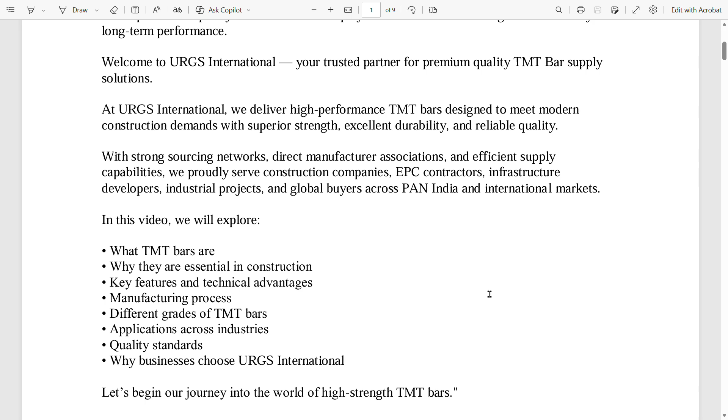In this video, we will explore what TMT bars are, why they are essential in construction, key features and technical advantages,

manufacturing process, different grades of TMT bars, applications across industries, quality standards, and why businesses choose URGS International.

Let us begin our journey into the world of high strength TMT bars.

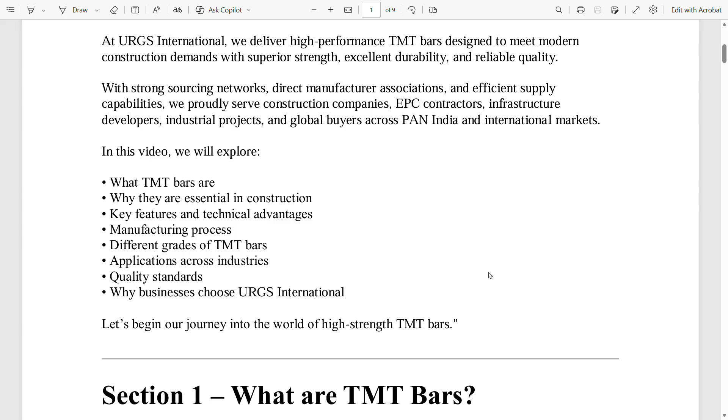Section 1: What are TMT bars? TMT stands for thermo-mechanically treated bars. These are high strength reinforcement steel bars widely used in construction and infrastructure projects.

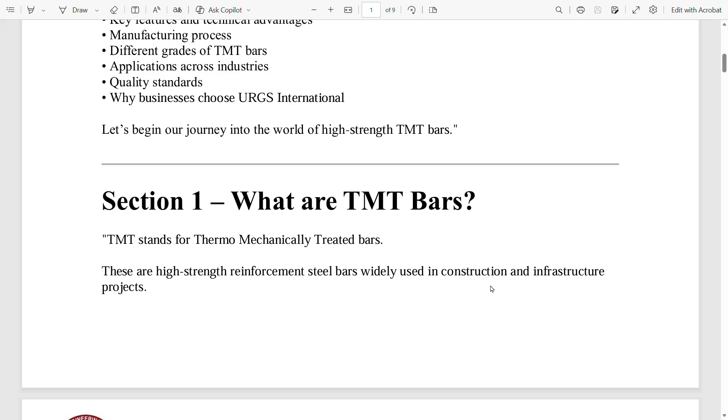TMT bars are specially manufactured through advanced thermomechanical treatment processes that improve their strength, flexibility, corrosion resistance, and durability.

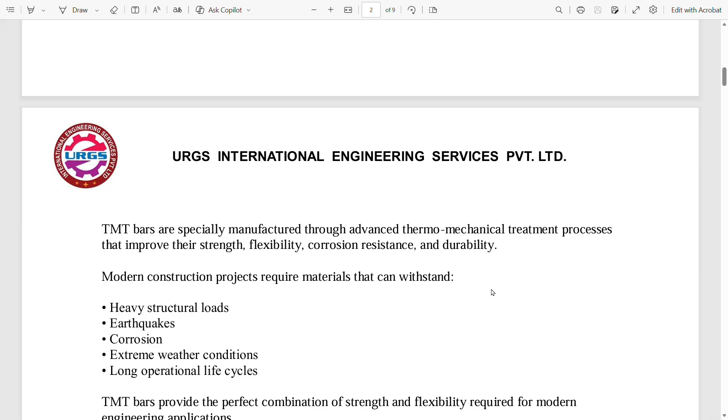Modern construction projects require materials that can withstand heavy structural loads, earthquakes, corrosion, extreme weather conditions, and long operational life cycles. TMT bars provide the perfect combination of strength and flexibility required for modern engineering applications.

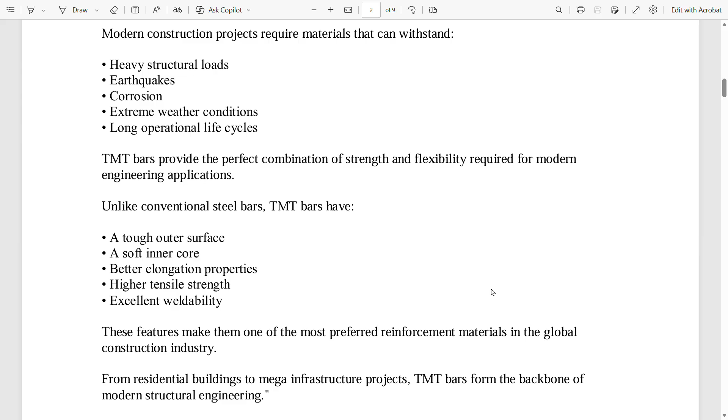Unlike conventional steel bars, TMT bars have a tough outer surface, a soft inner core, better elongation properties, higher tensile strength, and excellent weldability. These features make them one of the most preferred reinforcement materials in the global construction industry.

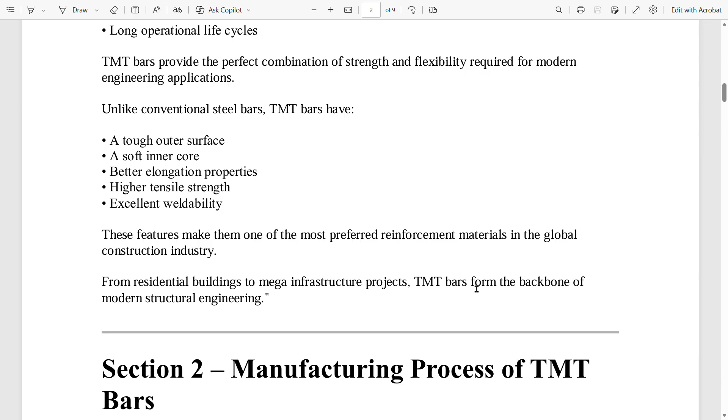From residential buildings to mega infrastructure projects, TMT bars form the backbone of modern structural engineering.

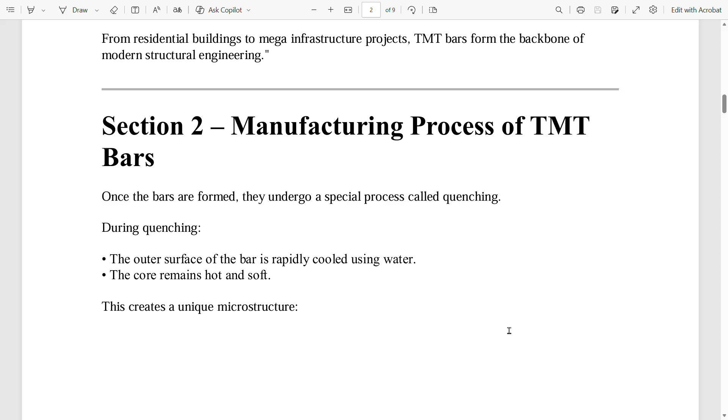Now, the manufacturing process of TMT bars. Once the bars are formed, they undergo a special process called quenching. During quenching, the outer surface of the bar is rapidly cooled using water while the core remains hot and soft. This creates a unique microstructure.

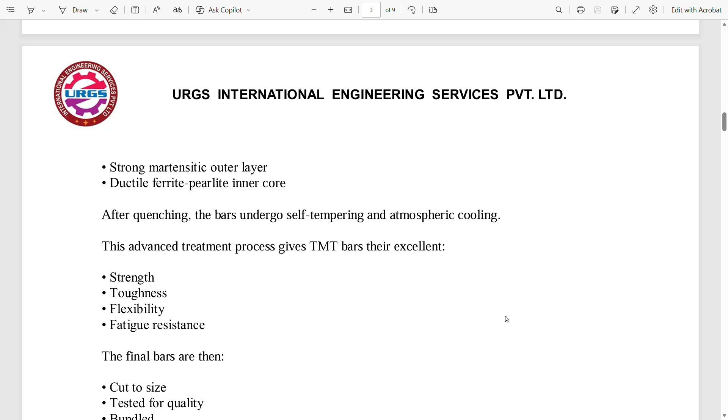Strong martensitic outer layers, ductile ferrite perlite inner core. After quenching, the bar undergoes self-tempering and atmospheric cooling.

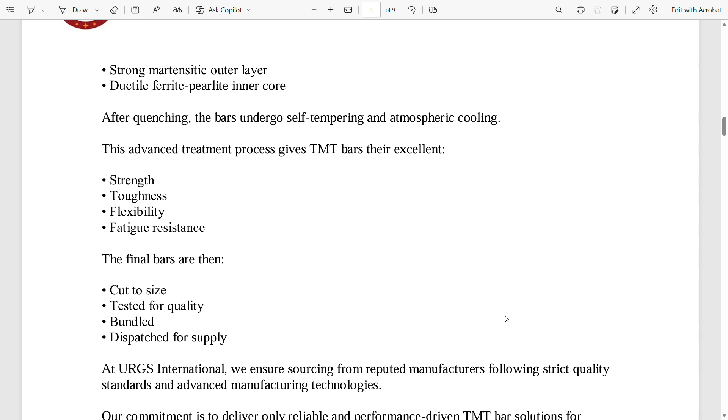This advanced treatment process gives TMT bars their excellent strength, toughness, flexibility, and fatigue resistance. The final bars are then cut to size, tested for quality, bundled, and dispatched for supply.

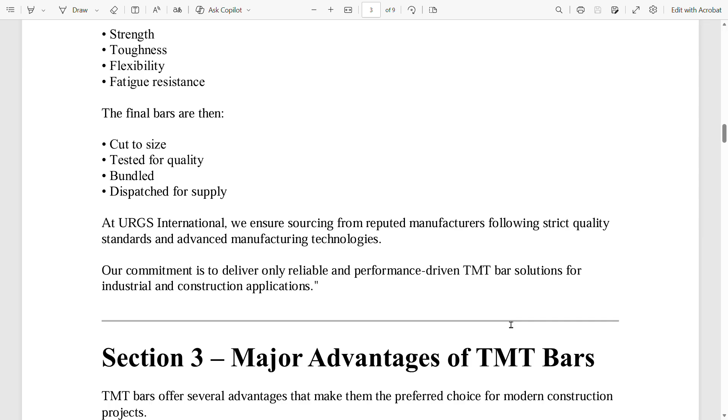At URGS International, we ensure sourcing from reputed manufacturers, following strict quality standards and advanced manufacturing technologies. Our commitment is to deliver only reliable and performance-driven TMT bar solutions for industrial and construction applications.

Now, major advantages of TMT bars. TMT bars offer several advantages that make them the preferred choice for modern construction projects.

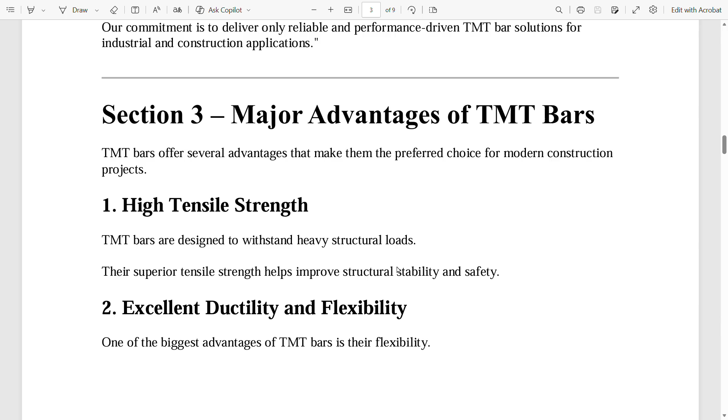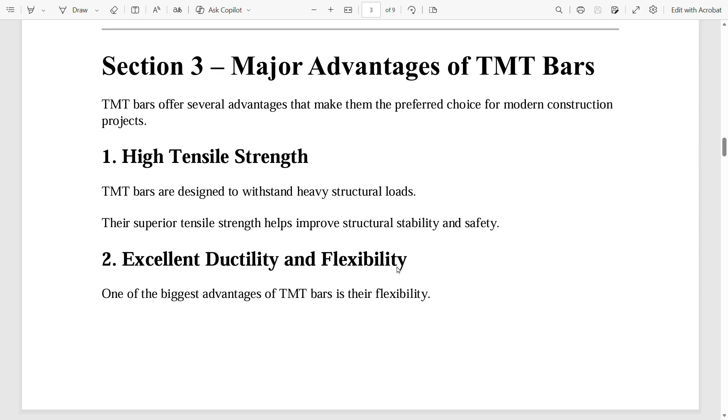First, high tensile strength. TMT bars are designed to withstand heavy structural loads. Their superior tensile strength helps improve structural stability and safety. Second, excellent ductility and flexibility.

One of the biggest advantages of TMT bars is their flexibility. This property allows structures to absorb shocks and vibrations during earthquakes and seismic activities.

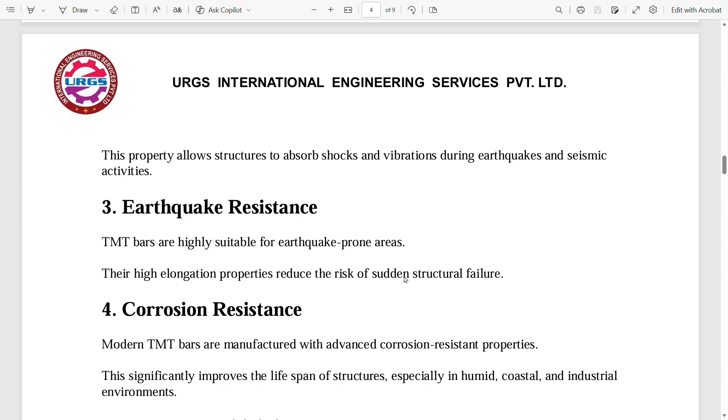Third, earthquake resistance. TMT bars are highly suitable for earthquake-prone areas. Their high elongation properties reduce the risk of sudden structural failure.

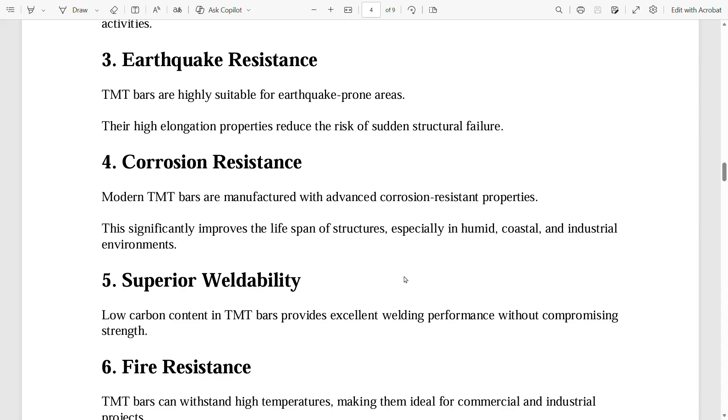Fourth, corrosion resistance. Modern TMT bars are manufactured with advanced corrosion resistant properties. This significantly improves the lifespan of structures, especially in humid, coastal, and industrial environments.

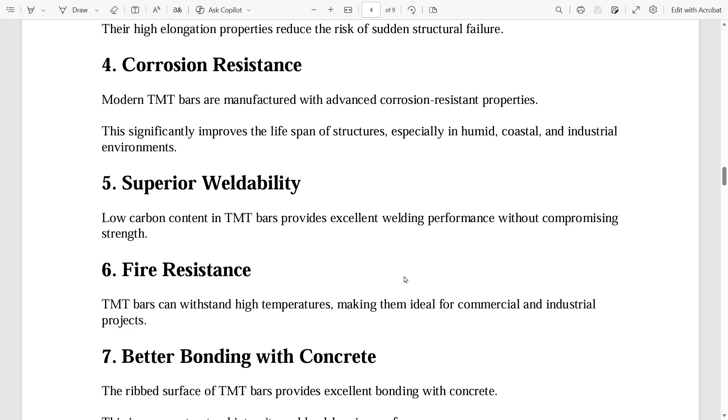Fifth, superior weldability. Low carbon content in TMT bars provides excellent welding performance without compromising strength. Sixth, fire resistance.

TMT bars can withstand high temperatures, making them ideal for commercial and industrial projects. Seventh, better bonding with concrete: the ribbed surface of TMT bars provides excellent bonding with concrete, which increases structural integrity and load-bearing performance.

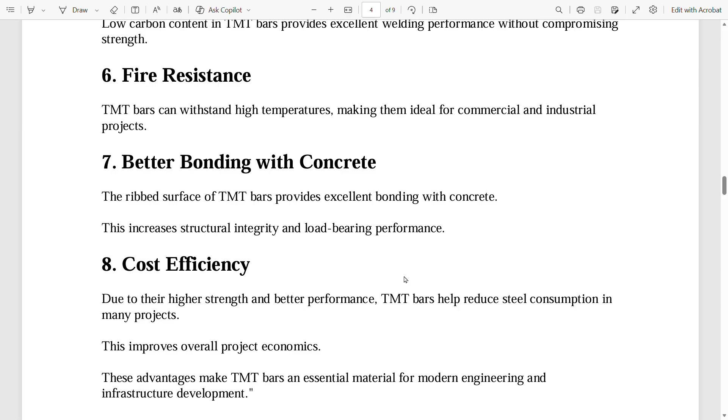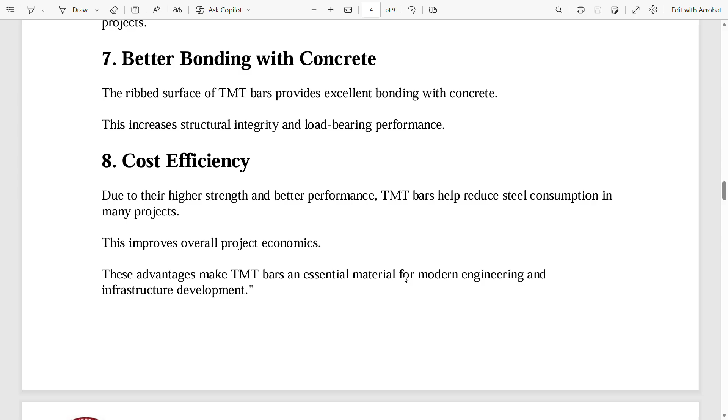Eighth, cost efficiency. Due to their high strength and better performance, TMT bars help reduce steel consumption in many projects, improving overall project economics. These advantages make TMT bars an essential material for modern engineering and infrastructure development.

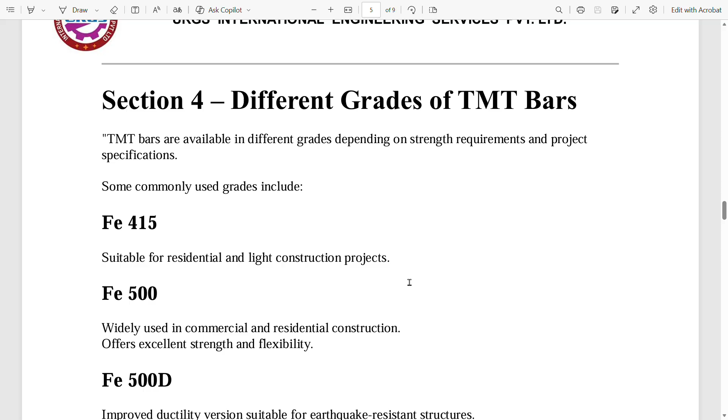Now, different grades of TMT bars. TMT bars are available in different grades depending on strength requirements and project specifications. Some commonly used grades include FE415, suitable for residential and light construction projects, and FE500, widely used in commercial and residential construction, offering excellent strength and flexibility.

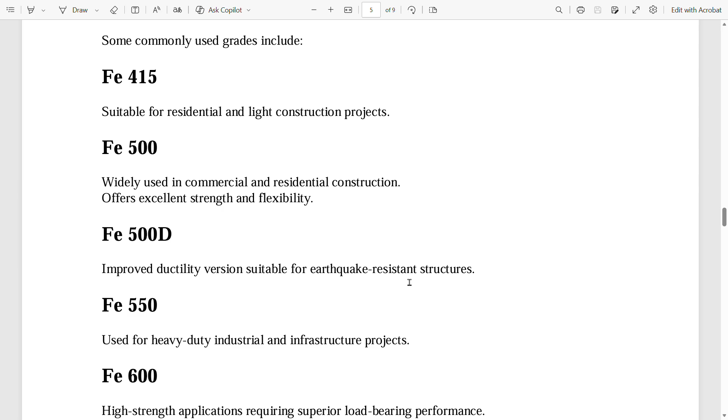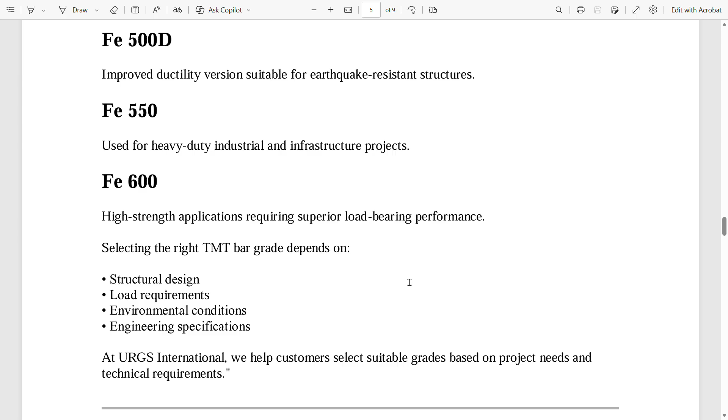FE500D is an improved ductility version, suitable for earthquake-resistant structures. FE550 is used for heavy-duty industrial and infrastructure projects. FE600 is for high-strength applications requiring superior load-bearing performance. Selecting the right TMT bar grade depends on structural design, load requirements, environmental conditions, and engineering specifications.

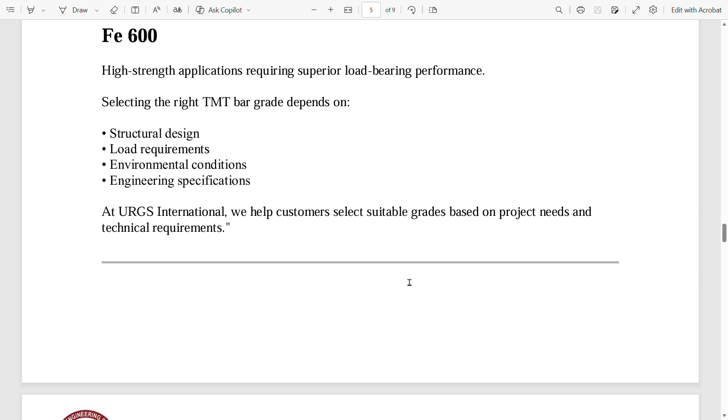At URGS International, we help customers select suitable grades based on project needs and technical requirements. Now, Section 5, applications of TMT bars. TMT bars are widely used across multiple industries and infrastructure sectors.

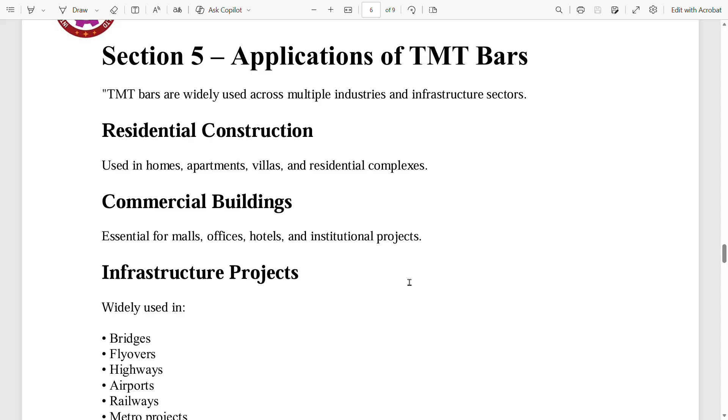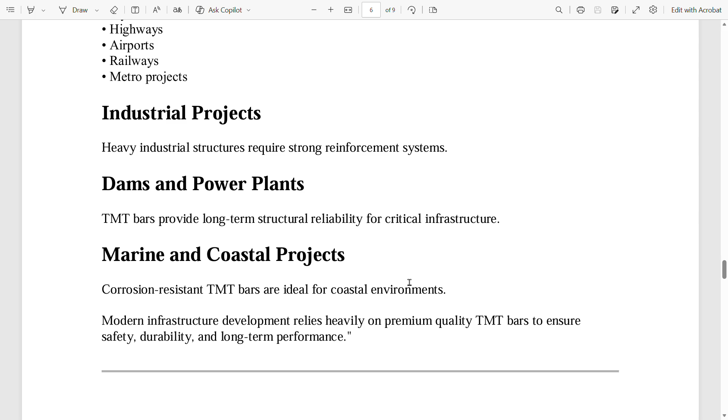Residential construction: used in homes, apartments, villas, and residential complexes. Commercial buildings: essential for malls, offices, hotels, and institutional projects. Infrastructure projects: widely used in bridges, flyovers, highways, airports, railways, and metro projects. Industrial projects: heavy industrial structures require strong reinforcement systems.

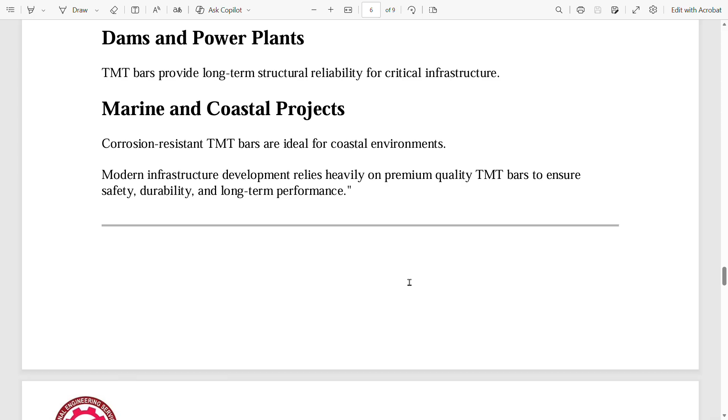Dams and power plants: TMT bars provide long-term structural reliability for critical infrastructure. Marine and coastal projects: corrosion-resistant TMT bars are ideal for coastal environments. Modern infrastructure development relies heavily on premium quality TMT bars to ensure safety, durability, and long-term performance.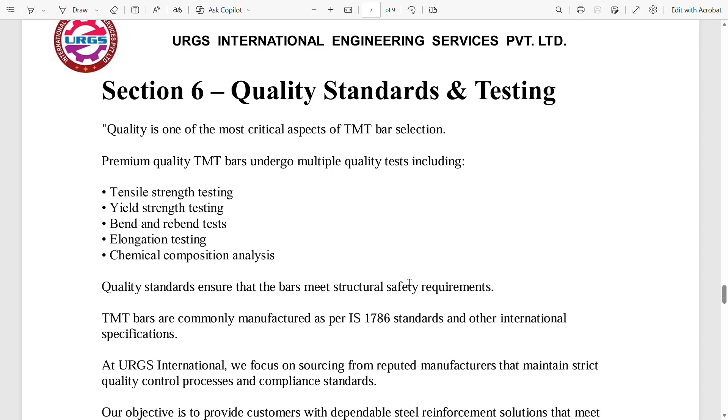Now, quality standards and testing. Quality is one of the most critical aspects of TMT bar selection. Premium quality TMT bars undergo multiple quality tests including tensile strength testing, yield strength testing, bend and rebend tests, elongation testing, and chemical composition analysis. Quality standards ensure that the bars meet structural safety requirements.

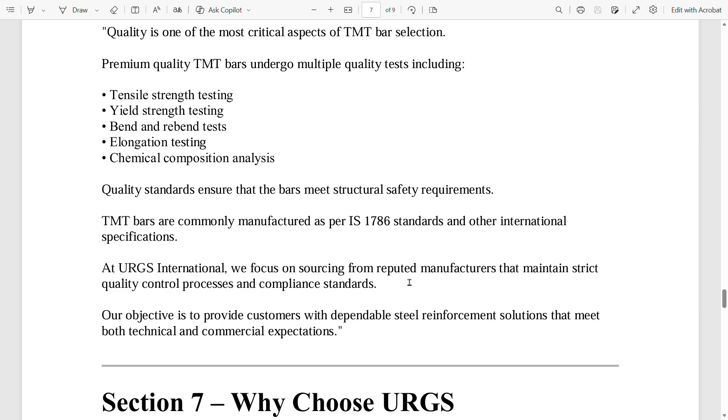TMT bars are commonly manufactured as per IS 1786 standards and other international specifications. At URGS International, we focus on sourcing from reputed manufacturers that maintain strict quality control processes and compliance standards. Our objective is to provide customers with dependable steel reinforcement solutions that meet both technical and commercial expectations.

Now, why choose URGS International? URGS International is committed to delivering reliable, professional, and value-driven TMT bar supply solutions. Why do customers choose URGS International? Direct manufacturer sourcing: we work with reputed rolling mills and steel manufacturers. Pan-India supply capability: efficient logistic support ensures timely deliveries.

Then, bulk and project supply solutions, meaning we support infrastructure, EPC, industrial and export projects. Then, technical and commercial support, meaning our experienced team provides professional coordination and customer assistance. Then, competitive commercials, which is also our advantage: we deliver cost-effective procurement solutions without compromising quality.

Then, at last, reliable long-term partnerships. We believe in building sustainable business relationships through trust, performance, and commitment. At URGS International, our mission is to support industrial growth and infrastructure development through quality steel reinforcement solutions and dependable supply services.

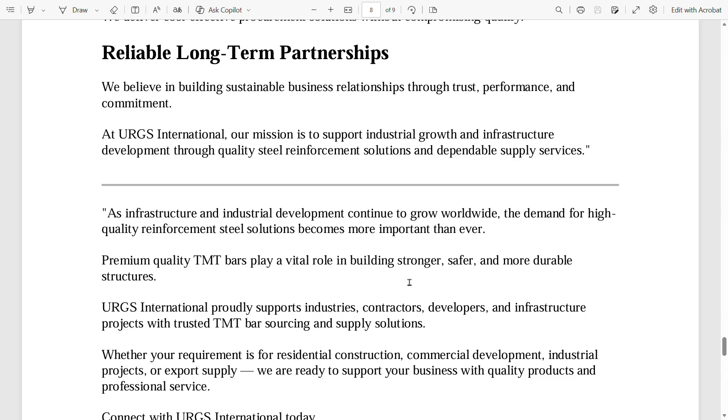As infrastructure and industrial development continue to grow worldwide, the demand for high-quality reinforcement steel solutions becomes more important than ever. Premium quality TMT bars play a vital role in building stronger, safer, and more durable structures. URGS International proudly supports industries, contractors, developers, and infrastructure projects with trusted TMT bar sourcing and supply solutions.

Whether your requirement is for residential construction, commercial development, industrial projects, or export supply, we are ready to support your business with quality products and professional service.